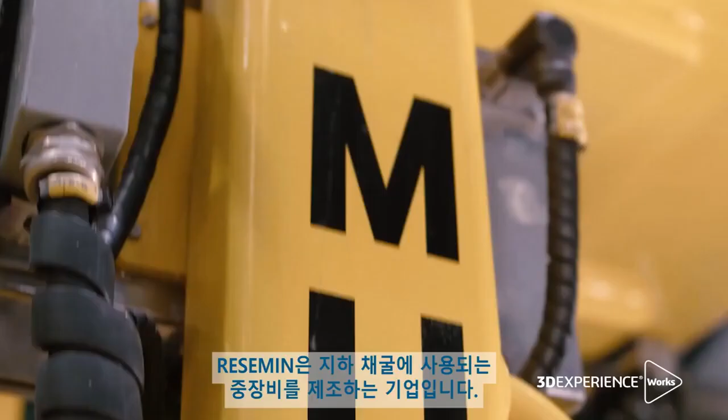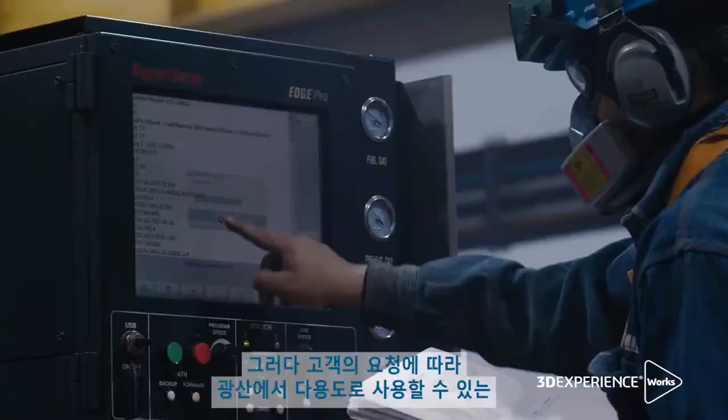Resemin is a company that manufactures heavy machinery for underground mining. We started to make machinery in about 2008. Then, at the request of our customers, we started to make more kinds of machines for several uses in the

mine. We need to ensure that the operator will be safe in the cabin of our machines. And not only in the cabin. And about production, we need to ensure that the equipment can make the holes as big as the company needs.

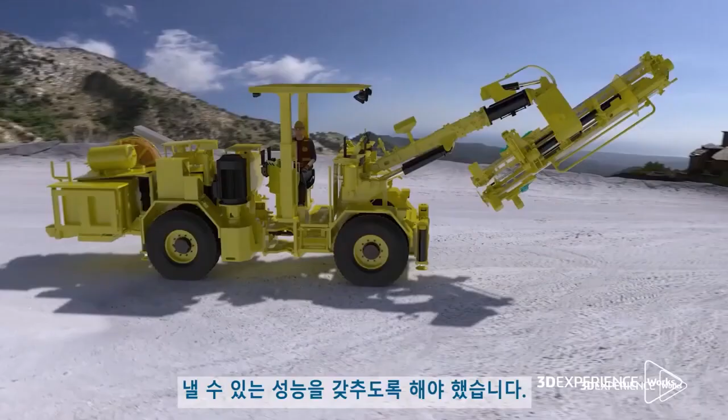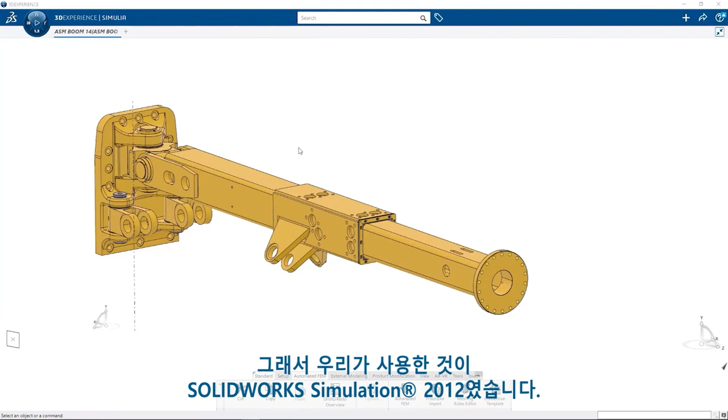Challenges: first, try to design the models as fast as we can. With this, we need to make our analysis about the resistance of the structures in less time with more accuracy. We started to use SolidWorks Simulation in 2012 because the customers asked us for some certifications, and started to use SolidWorks Simulation to make this kind of studies.

Last year I was making this same test in SolidWorks Simulation Premium, and it took us about 6 hours. But 6 hours is too long for our actual process.

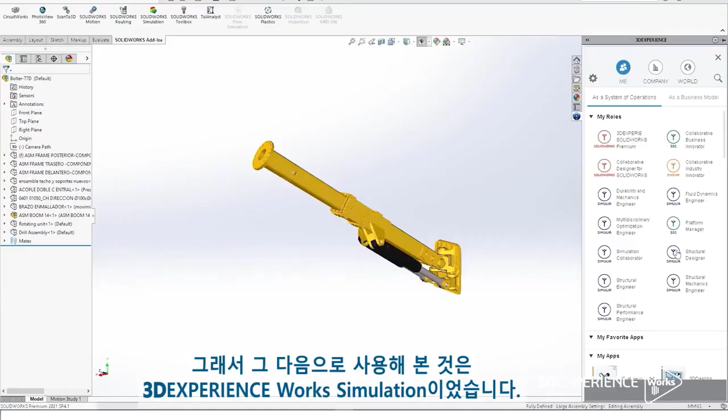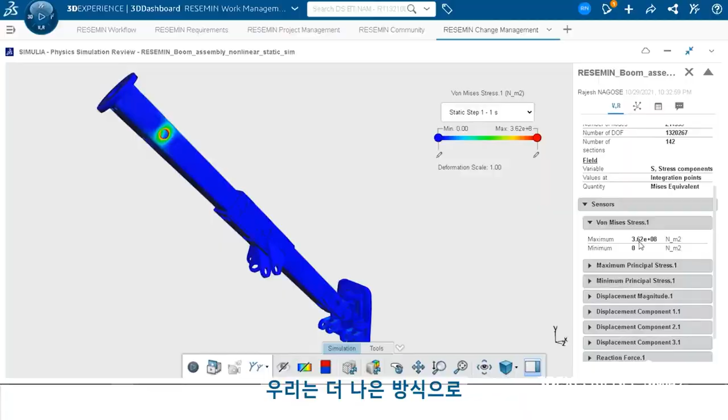And we started to use 3DEXPERIENCE Works Simulation in order to reduce these times and increase the accuracy of the test. So right now it only takes us about 2 hours, and we have an accuracy of about 92-93%. With the cloud solutions, we started to communicate our results of the simulations to our manager in a better

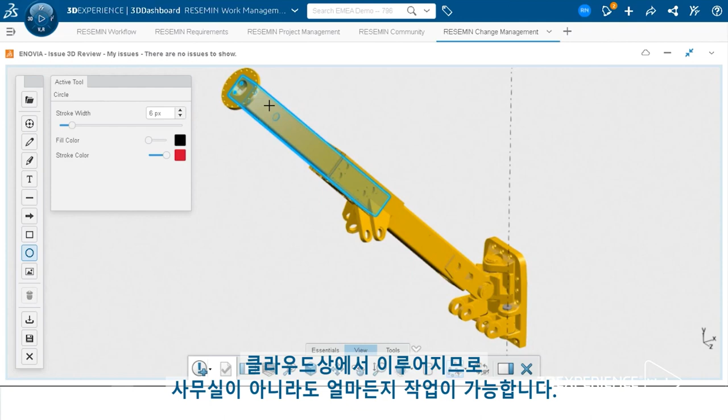way and in less time. With this, he can make some comments, and he doesn't need to be at the office to see the results and communicate to us the changes that we need to do. So it's about acceleration of the process.

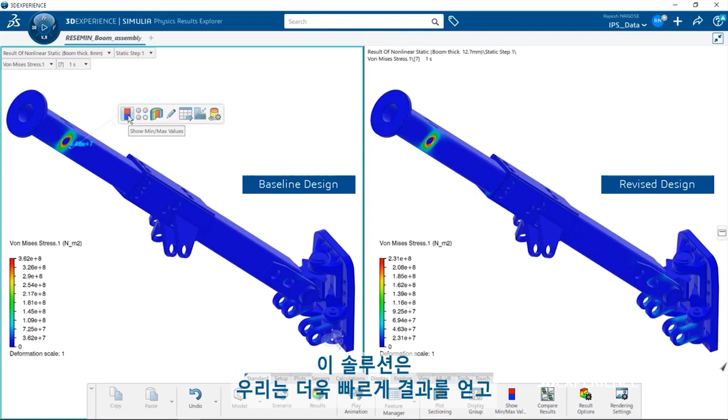The result was our clients are more satisfied with our machines. I think the platform will help us to reach our goals, because it's giving us more velocity to get results and give our production teams the correct information in less time.